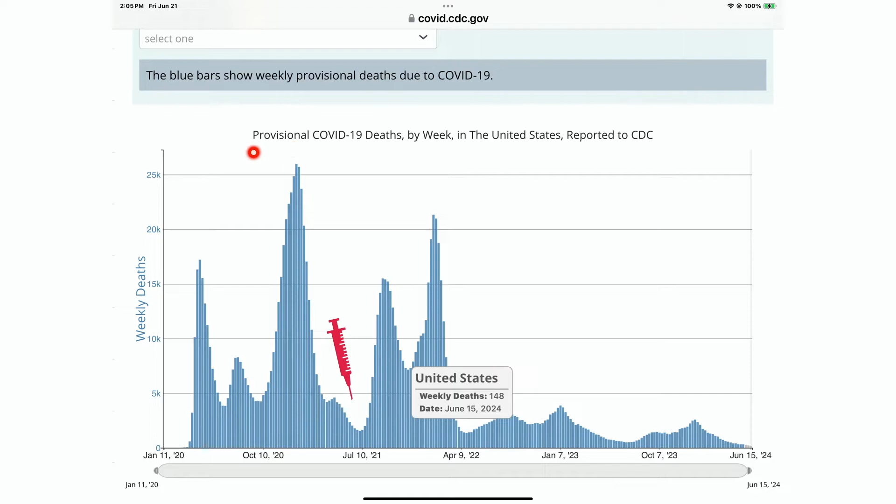These are provisional deaths of COVID-19. Provisional deaths mean that they are dependent upon each of the states sending in data based off of death certificates. It's the best data that we can have, death certificates. However, the reporting rate differs among the states. So this number most likely goes up as time goes on, as more states report. Personally, I don't think the numbers are as accurate as they used to be since the World Health Organization declared the pandemic over. Okay.

Here is a chart of the R factor on the y-axis over time. This is this year, recent data. The R factor tells us whether or not the virus is gaining on us, whether one person is infecting more than one person, the virus is gaining, or the virus is losing ground, okay? R factor less than 1, the virus is losing. R factor greater than 1, the virus is winning.

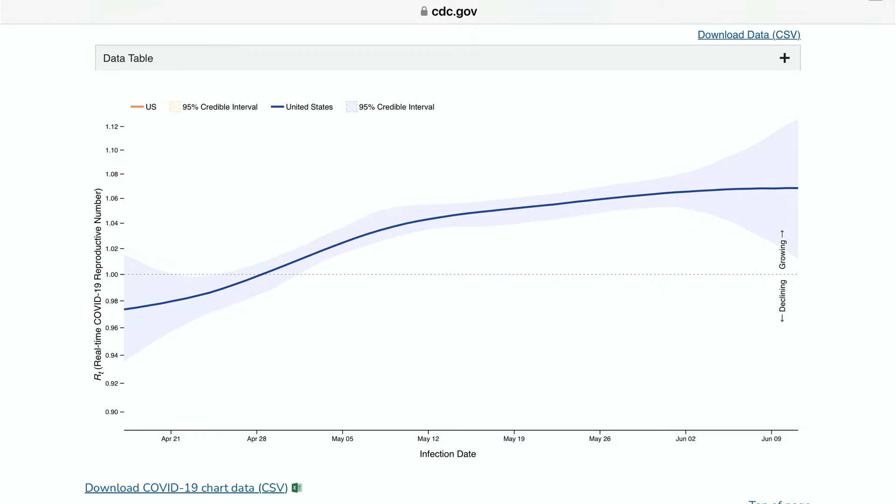You can see back here in April, here's the R factor on the y-axis, here's time. Here is 1, the cutoff point between whether we're winning or losing. You can see here where we were winning, the virus was not gaining on us, but now it's crossed over the threshold value of 1. And so now the virus is gaining on us, okay? We're going to see more COVID-19 test results, hospitalizations, and hence we're going to see more COVID deaths.

The R factor is going up because the virus continues to mutate. This is the weight percentage of whatever variant we're looking at. And this is data over time. Okay, and you can see the JN1 variant is starting to go out of the system. The KP2, KP3 virus is now starting to become the dominant strain and is predicted to indeed become the dominant strain. It is more contagious. That is why we see the R factor going up.

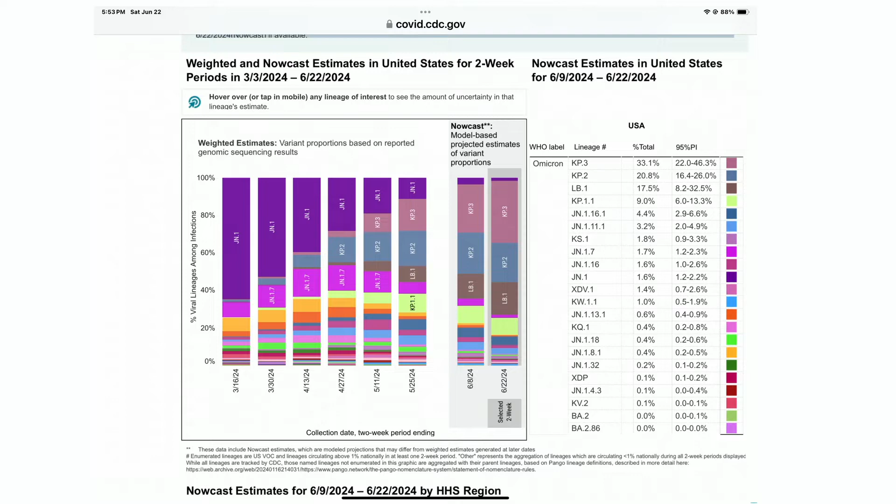We also see it in the emergency room visits. This chart shows the number of people in the emergency room who have tested positive for either RSV, COVID, or influenza. They come into the emergency room. They're sick with something. They're having symptoms. We know it's RSV, COVID, or influenza. So this is what this chart is reflecting. You can see over here on the end where COVID-19 is starting to trend up. COVID-19 was down, and now our R factor is greater than 1, and you can see correspondingly that the data shows that COVID-19 is trending up.

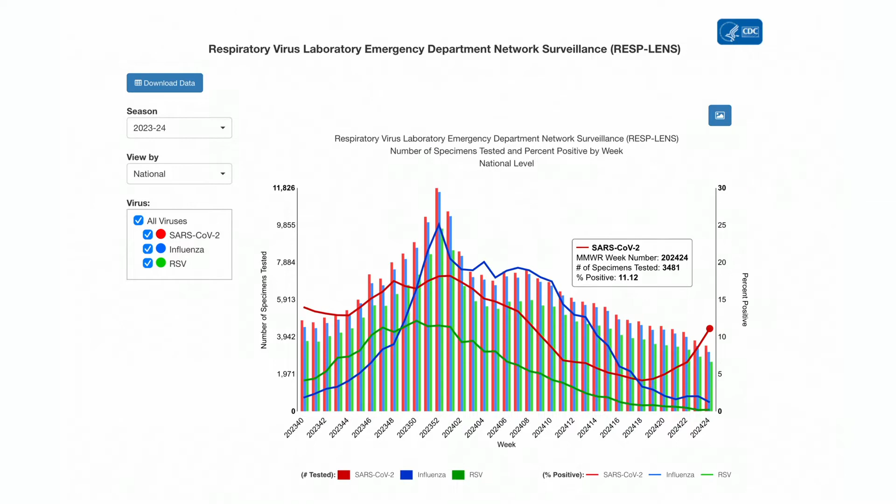This next chart shows the percentage of emergency room visits diagnosed with COVID-19 by age group. It's for a long period of time. Here's the most recent data on the end. You can see that for all age groups now, since April, the data is starting to trend up, which is consistent with the R factor that we saw going up. It is also consistent with the mutation of the virus. We see the KP2 and KP3 variants starting to become the dominant strain.

Also, what is noteworthy here to take away from this graph: this is the percentage of diagnosed people in emergency rooms with COVID. The leading group, the older you are, the higher percentage of diagnosis of COVID you make up in the emergency room. The younger you are, 12 to 15, the lower the percentage of people you make up in the emergency room that are diagnosed with COVID. So this is what we've always known.

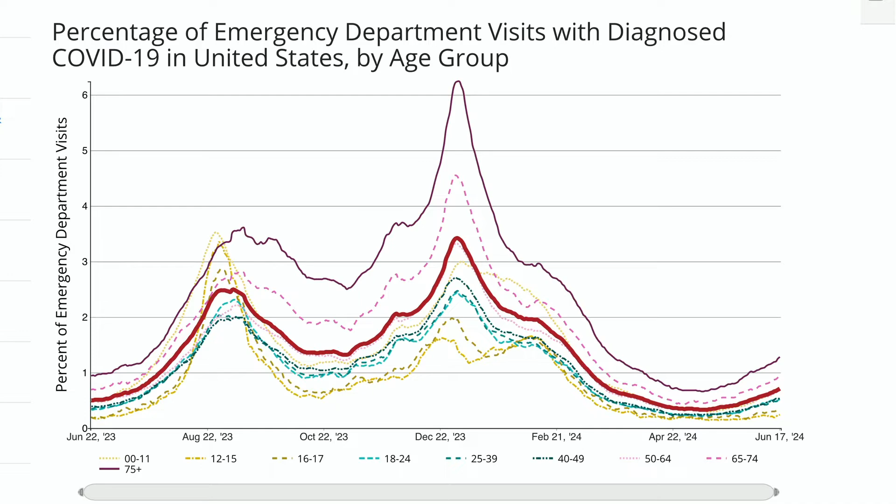If you're older, you must protect yourself. If you're over 60 years old, take precautions. Okay, wear your mask. I know, but it's up to you to take care of yourself. If you have diabetes or are otherwise immunocompromised, cancer recovery, cancer patients, wear your mask. Don't worry about how people are going to look at you, what other people say. It's up to you to take care of yourself. COVID-19 is a public health issue, not a political issue.

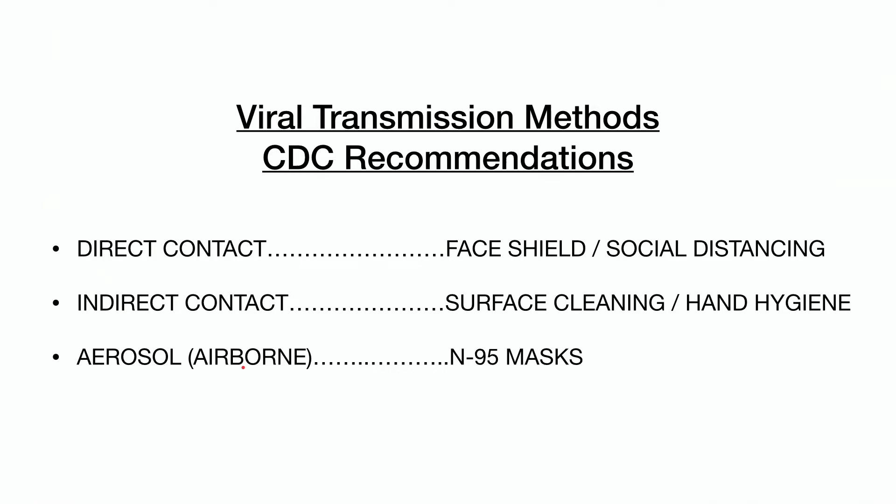You know, during the 14th century, I think it was, the bubonic plague came along, killed about 50 million people on several continents. Come to find out, it was transmitted by fleas. We learned from the bubonic plague that it wasn't a good idea to keep housing people in barns along with animals. People and animals shouldn't cohabitate in barns together. That's what we learned from the bubonic plague, 50 million deaths later.

What we should have learned from the COVID-19 pandemic, the 2020 pandemic, is that aerosol transmission spread by HVAC turbulence is what we need to get rid of. Aerosol transmission is what WIJTECH is working on, along with some other entities in our country. It is the primary method for transmitting COVID-19. It's the cause of the 2020 pandemic, aerosol transmissions.

Looking at the CDC recommendations for combating aerosol transmissions, we recognize that people got sick indoors and not outdoors. So this is dilution. Open up your doors and windows and maximize HVAC purge rates. That's dilution. That's trying to make the inside like the outside, bringing in fresh air to dilute the concentration of COVID-19 low enough that people don't get infected. Only one problem with that. We don't know what the upper limit is for COVID-19 in a room above which people get sick. We don't know what the upper limit is. We don't know what the control point is.

We're taking what was a stopgap temporary solution, and we're now integrating it into standards to make it a permanent solution. High purge rates, dilution, when we don't know what to dilute down to, number one. Number two, well, let's look at what dilution does. From a block diagram standpoint, here we have indoor space that we're putting energy in to heat or cool, bringing in fresh air. The standard calls for bringing in so much fresh air per person. The more fresh air you bring in, the more you have to exhaust. In the building, what comes in has to equal what goes out. If it doesn't, if what goes in is more than what goes out, the building blows up.

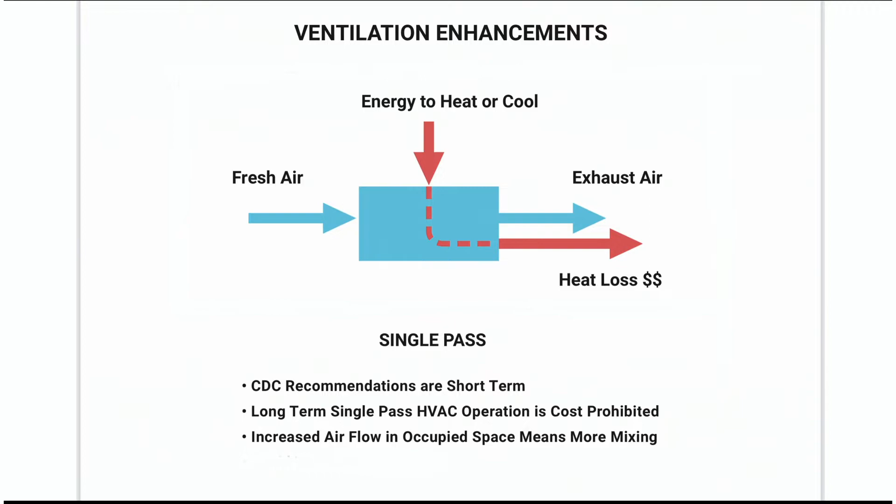The amount of energy loss is going to be directly proportional to the amount of exhaust air. Or another way to say it, the amount of energy loss is going to be directly proportional to the amount of fresh air you bring in, because the amount of fresh air in equals the amount of fresh air out. Okay, so the problem here is

we have goals of net zero by 2050. We're doing things, decarbonization of HVAC systems. We're looking to convert HVAC systems from fossil fuels to refrigerants so we can use heat pumps in areas where we couldn't do it before. Excellent work going on in that area. But if we start implementing across the board this temporary solution of bringing in fresh air, high purge rates, we won't make 2050. It's not consistent with net zero by 2050.

The other problem with this is now when you look at the system operating in infection risk management mode, the purge rates have to be much higher. So you have to have a separate HVAC system that can move enough air to handle the purge rates. When you build that system, you can't turn it down to operate during normal operations. Turndown is a problem from the high purge rates to normal operation.

So the capital investment for buildings is increased by the strategy of dilution. Not only do you get higher energy costs, which we can quantify, you get higher investment costs. We need strategies, policies, technologies that are consistent with overall strategies, long-term goals. So let's just scratch these off the list.

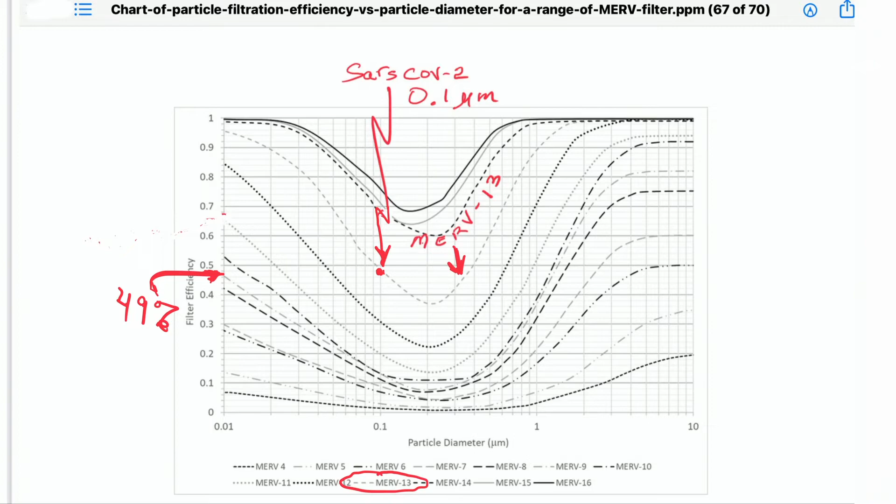SARS-CoV-2 has a particle diameter of 0.1 micron. If you come here to 0.1 micron, come up to the MERV 13 performance line, come over to the y-axis, we get about 49% removal efficiency for SARS-CoV-2 with a MERV 13 filter. That's not good enough for a virus like COVID-19. It's so highly infectious that you want much better than 50%. You want 99.9% efficiency, not 49% efficiency.

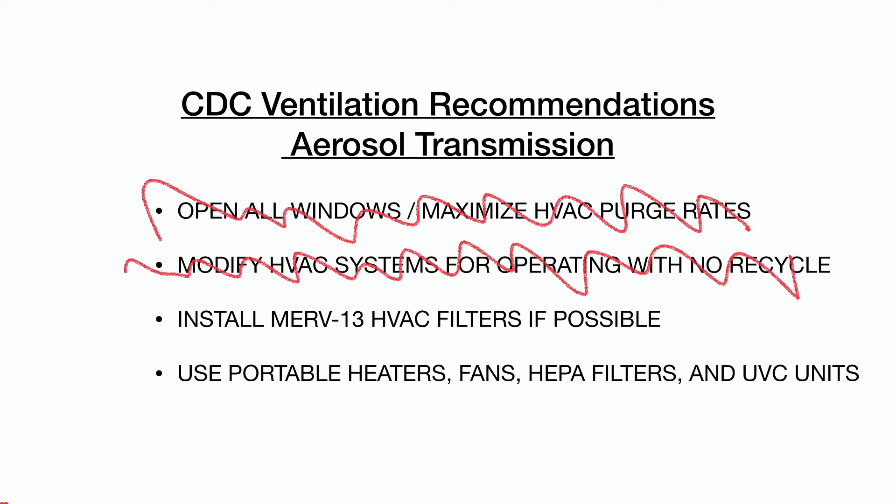Okay, so let's just scratch that one off the list, okay? It's not going to help us much. Now we're left with use portable heaters. Well, that's because this was temporary. Portable heaters was a temporary thing. But what we're looking at here is, let's put in HEPA filters and UVC units and see what that can do for us. Okay, let's take a look at that.

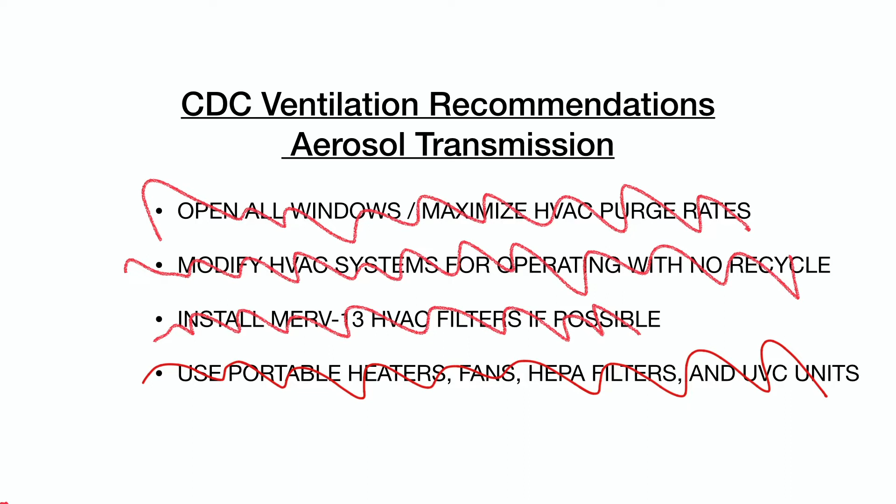So let's just get rid of that one too. Okay. So what do we have left? We have the aerosol system. Here's a schematic of the aerosol system.

We use thermal displacement ventilation. We get rid of the turbulence. Our body temperatures are 100 degrees. We're in a 70-degree cool environment. The hot air from our body wants to go to the ceiling. As we exhale, hot air from our lungs will go to the ceiling if we get rid of turbulence.

In our hot air, that's where any germs are going to be. So if someone's sick inside the space, they exhale, there's no turbulence in the room, the hot air will go to the ceiling. That's what the aerosol system is designed to do. So here are low velocity diffusers. We have to bring the air in at a low velocity so we don't create any turbulence. That allows the hot air to rise.

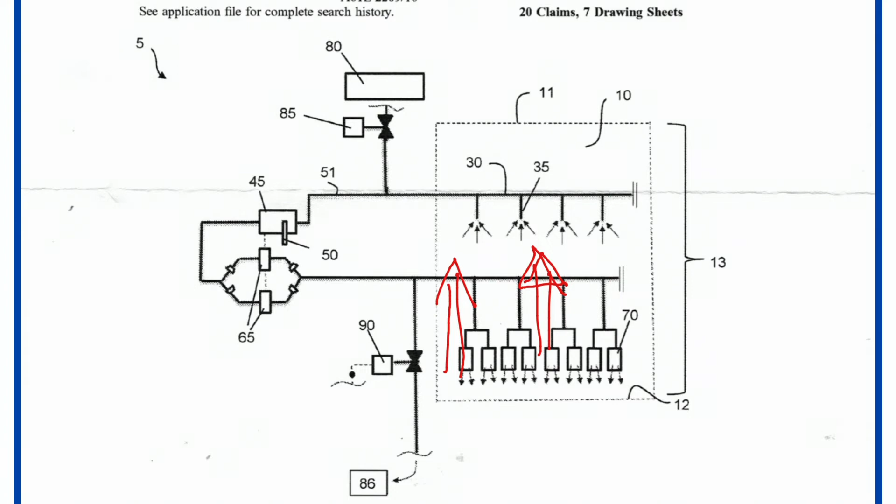We have a collection pipe overhead in the ceiling, and we have negative pressure on these nozzles, so that collection pipe sucks in the air that rises up. So instead of having turbulence blowing the air everywhere, every direction, what we do is we have a net direction of air from floor to ceiling, okay? And that gets rid of the spread of disease by turbulence.

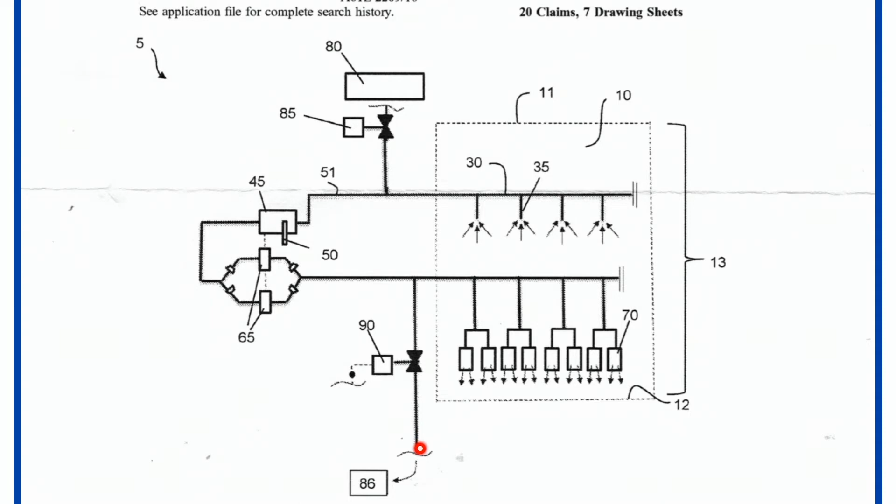The collection pipe takes the hot air into the air handler where it's cooled, it's treated with UVC light. The air is then fed to 2 turbo boosters because we have to boost the pressure up to run this system. The low velocity diffusers take more pressure to run. And so these boosters then feed our low velocity diffusers that are in the room sitting on the floor. We have the ability to bring in fresh air from the outside. We have the ability to purge air to the outside in the system.

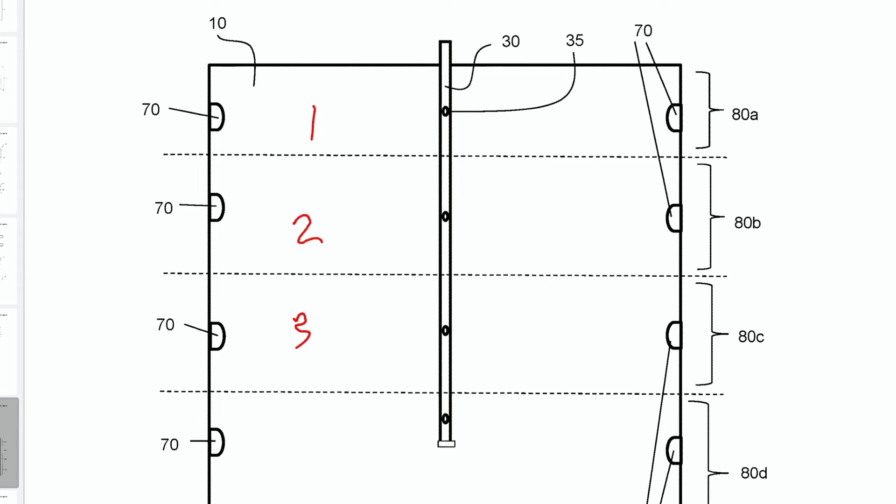We set up the diffusers on opposite sides of the wall. This is a plan view looking down. Here's the collection header in the middle, okay, with the nozzles. We have 4 nozzles shown here. Here's a diffuser on one side of the room, a diffuser on the opposite side of the room, same here, so that in effect we set up separate zones in this space. We have 4 zones in this 3,000 square foot space.

That prevents you from getting cross mixing of the air between the zones, and we'll be able to see that pattern that prevents cross mixing. We'll see that with smoke bombs. Okay. Give you a view of what the actual system looks like. Here's the collection manifold right here. You can see the collection manifold over here, the collection pipe right here with the nozzles in it, 1, 2, 3. There is another nozzle that you can't see, over here somewhere. Okay.

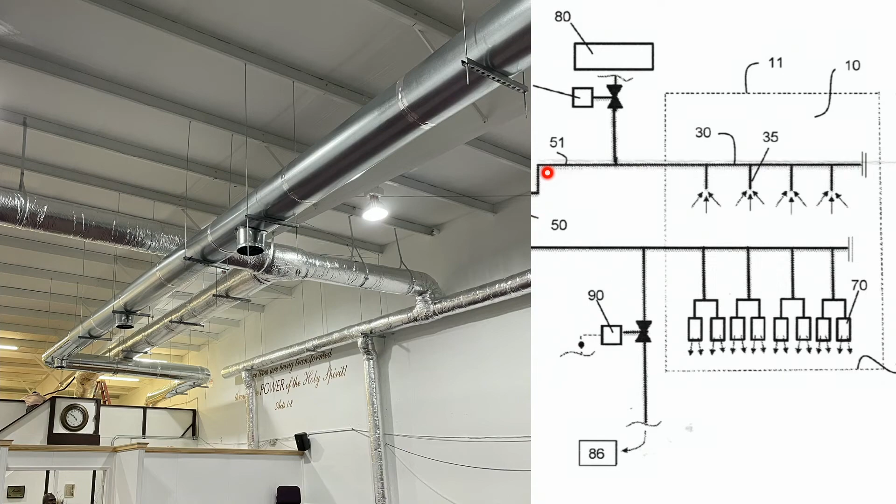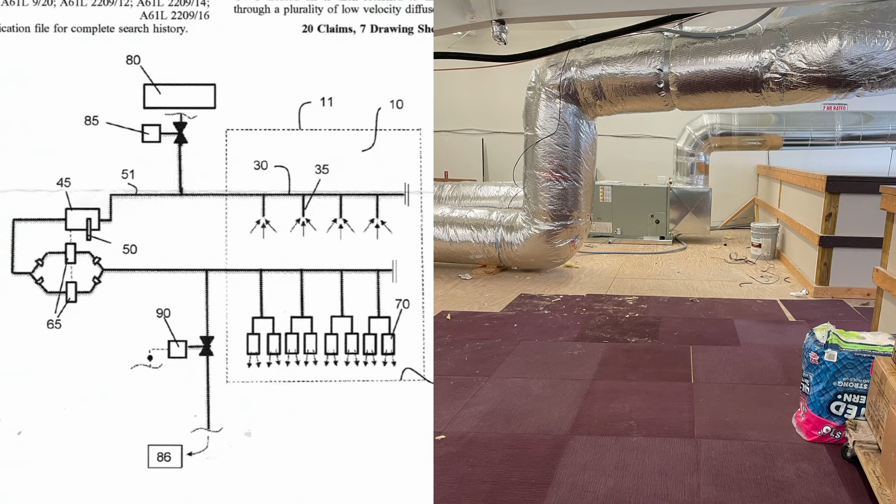So the hot air is collected overhead. It feeds into the air handler where we have a UVC light. A 25 watt UVC light is all you need. So here is the other end of the collection manifold running into the air handler. From there we go to the turbo boosters. So here we're coming from the air handler, we split, we go to the turbo boosters. The turbo boosters then feed the diffusers that are inside the building, sitting on the floor.

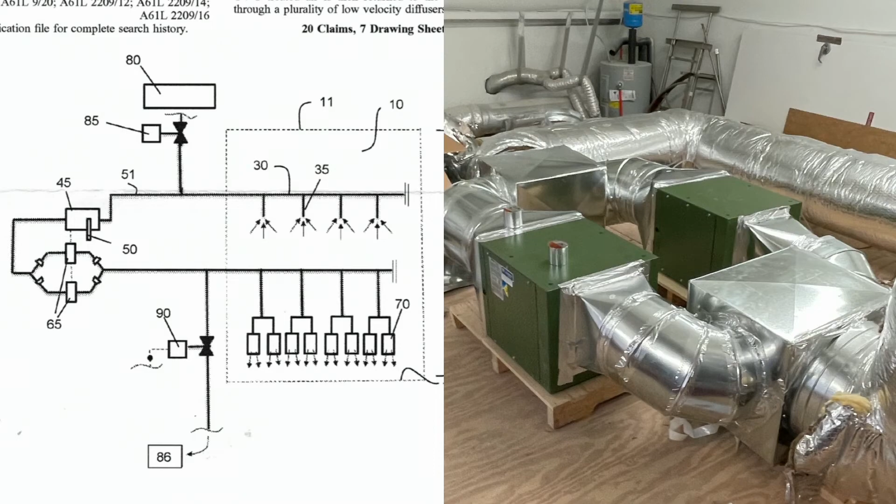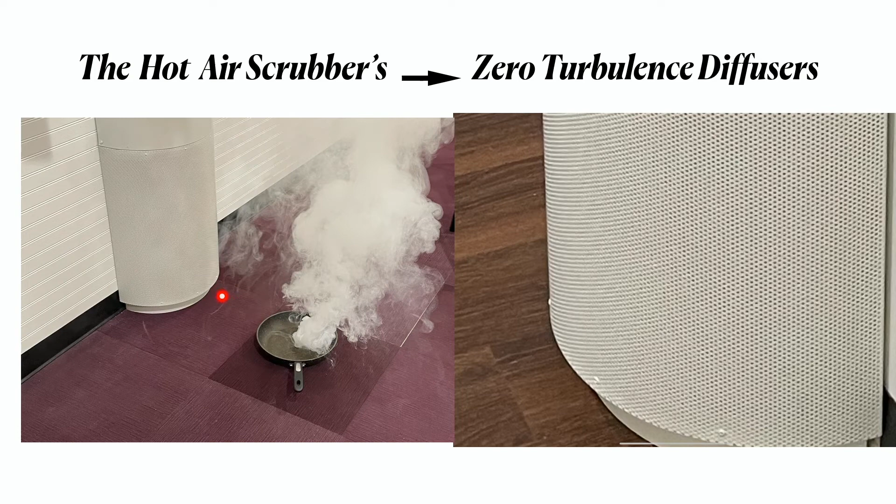We can bring air in. We can also purge air out with the system. Here, diffusers, we have 25 to 30,000 holes in one of these diffuser faces. I'm going to show you what the smoke bomb does, sitting a distance of 2 feet in front of one of these diffusers in the next slide. So here's our low velocity diffusers.

I left the sound up so you can hear the HVAC system is running. We're bringing in the air. We are not whipping that smoke all over the place. So we would not be spreading a lot of germs with this zero turbulence diffuser. Here's what standard HVAC turbulence looked like. Here's what it did to the smoke bomb, so you have an A-B comparison. It's a video that you saw earlier.

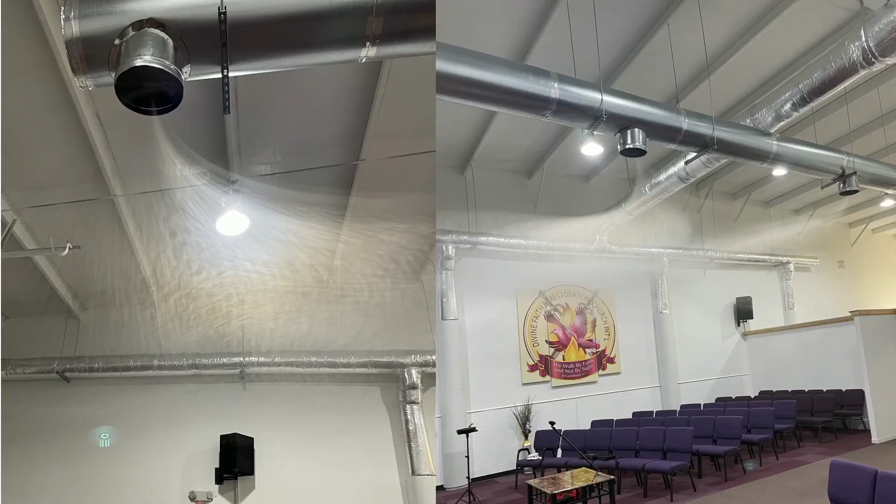Of course, now the smoke bomb has finished burning, so that means 40 seconds has passed, and you can already see that this stuff is starting to be pulled over to the collection header. In this diagram here, you can see the first two nozzles here picking up the smoke. Okay. The next diagram, you can see the zones actually created overhead. There's no cross mixing. You're not going to get cross mixing in between zones here. This is going to avoid the cross mixing in between the zones.

Here's another view of the smoke bomb after it's finished burning. You can see that we clearly have established what we want to see, called stratification. And you can see that the nozzles are doing their job. They're collecting the smoke. This system was installed in a church sanctuary in November 2021. It's been running since then. To date, there have been no outbreaks of COVID-19, RSV, or any other airborne transmitted disease since this thing's been running. So the system's proven and tested.

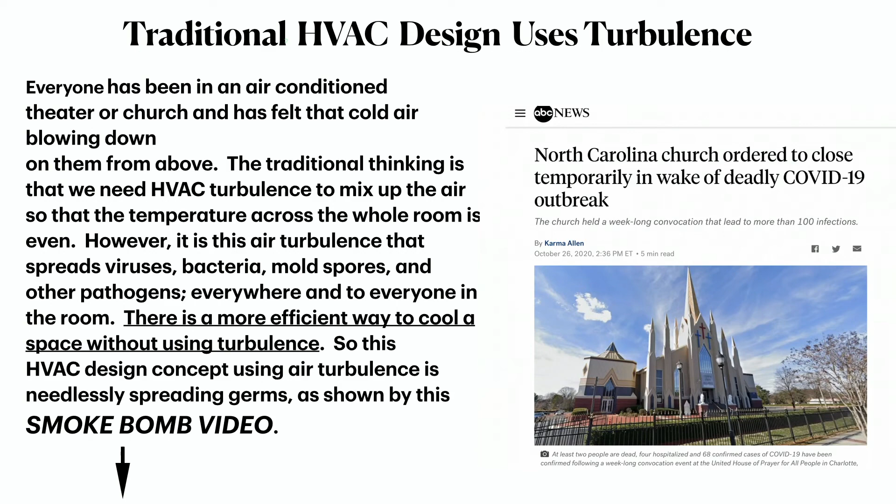We know that churches were notorious for being super spreader events. This church had an event here in Charlotte. It infected 100 people, and this church was shut down in 2020. 100 people were infected from a week-long event.

Okay, so in summary, we took a look at the CDC data. We've done an excellent job reducing deaths. I do believe the death numbers are underreported, but nevertheless, we have done a great job. Vaccine distribution, home kits, awareness, monoclonal antibodies, all those things have come together to give us an excellent result. Good news. Bad news, Omicron is still around, it's still mutating. When it starts to die out, it mutates again, and then it starts to come back. It's a bug. Bugs know how to survive. It's with us to stay. We have to deal with it. We have a method now to do it.

There's only one way to clean up indoor air spaces, because there's only one thing for you to exploit, and that is the temperature difference between the human body and the cool surroundings inside of a conditioned enclosed space. And that's how the Hot Air Scrubber system works.